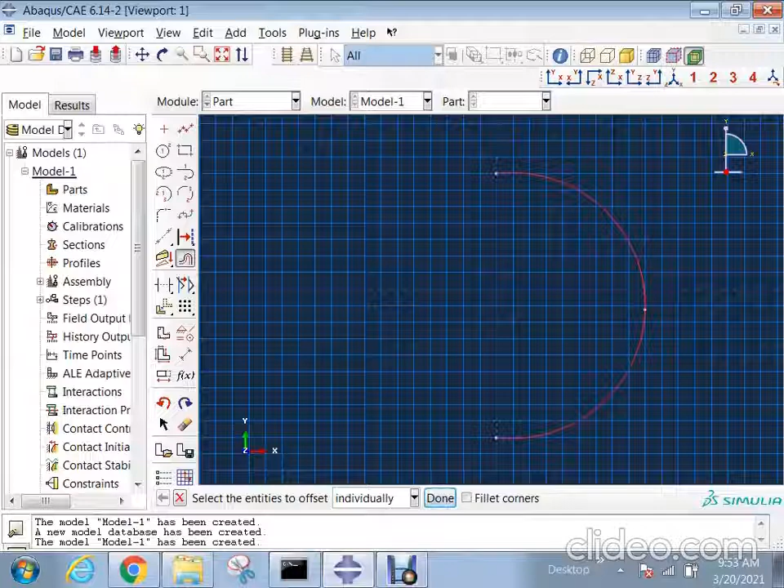So here the arch, just take an offset of it. Okay. So then I'll join these two lines.

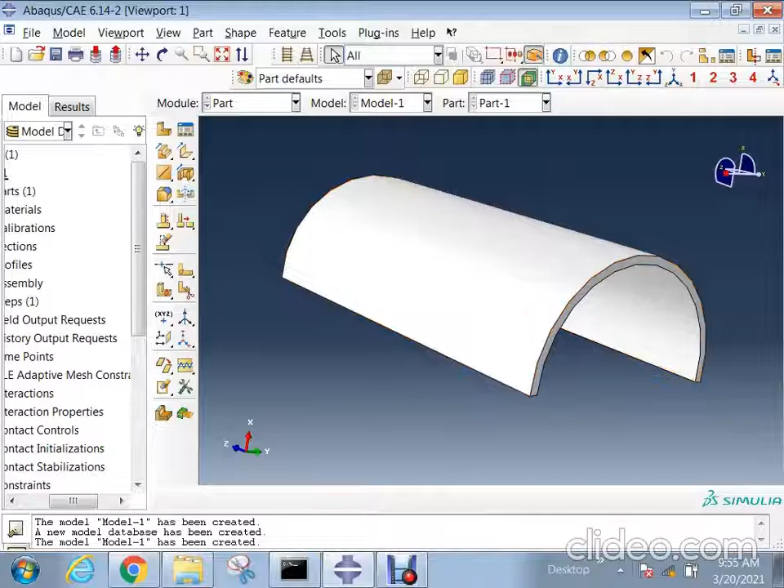So now we can see that this is a similar kind of arch. Okay, so we need to check for this what is our buckling load or critical buckling load using linear buckling analysis. So same, I'll take a material of this as steel itself.

Next, here for the step, go for linear perturbation. Here you can see that buckle, right? You can see this, right? So click on it, continue. You have two methods. One is the Lanczos method and the other is subspace. Subspace is for the limited frequencies or mode shapes you require. Lanczos is used for a large number of mode shapes you require.

For example, you want all the mode shapes for a certain range, then you can use the Lanczos method. Whereas if you require 10 to 15, you can use the subspace method. So I'll request here only 7 to 8. So I'll take 8 number of eigenvalues. Eigenvalues in the sense here buckling mode shapes. Okay. Now, if you want a maximum eigenvalue of interest, you can click here and you can write.

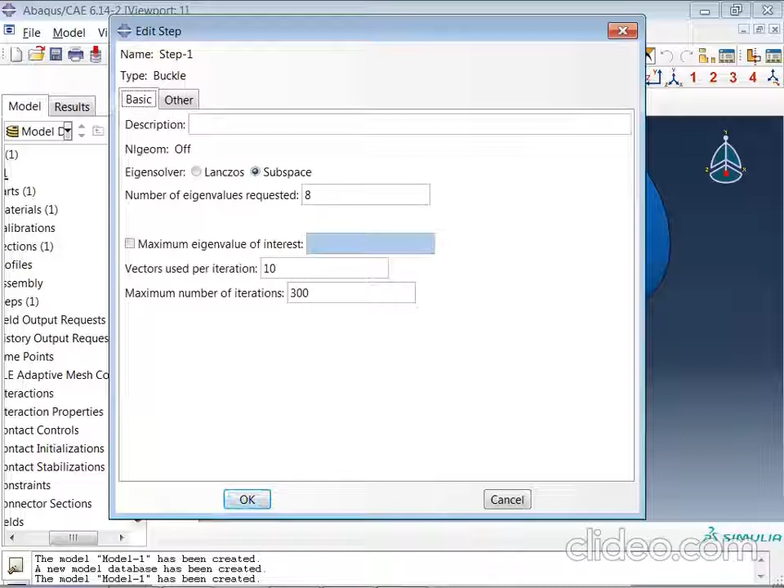And moving to the next is a symmetric solver itself, matrix storage. So this becomes your step 1 for buckling. Moving to the next is interaction. If any load or anything is there, you can use that, or else just move towards loading. So boundary condition is initial. I'll consider one end as a constraint. So encastre, and the other end I will be adding a compressive load.

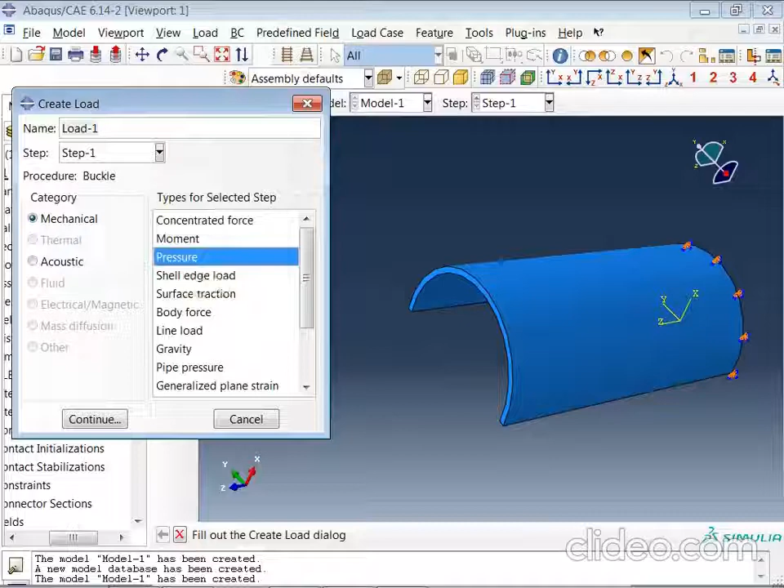So you can take pressure or anything. I'll consider a pressure or a surface traction. It will act only on the surface. So I'll select the surface. Now, what do you require? A shear value or a general? Here we are applying a compressive load, so I'll just consider a general value and the magnitude. I'll apply a very simple load like 1 as the magnitude.

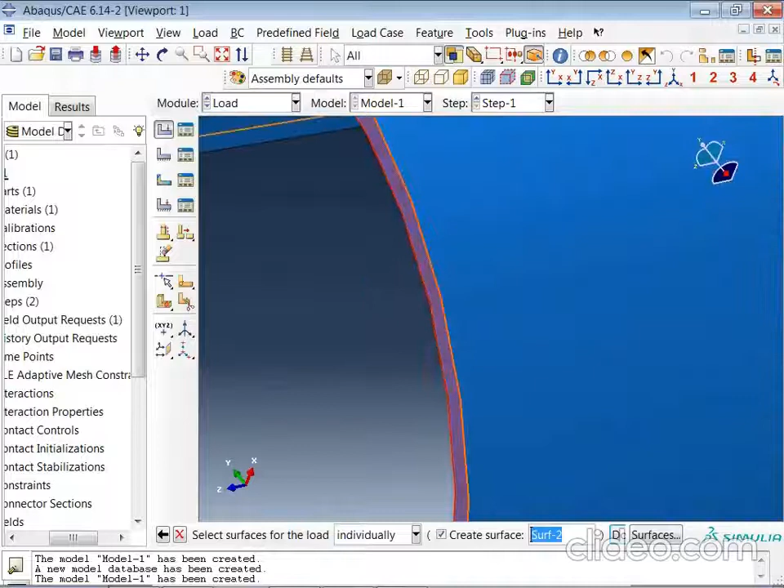Okay. So this load is not a proper one, so we'll delete this. We'll take a pressure load itself, that would be better. Select the surface and a magnitude I'll consider only 1. Why I have taken 1, I'll explain to you.

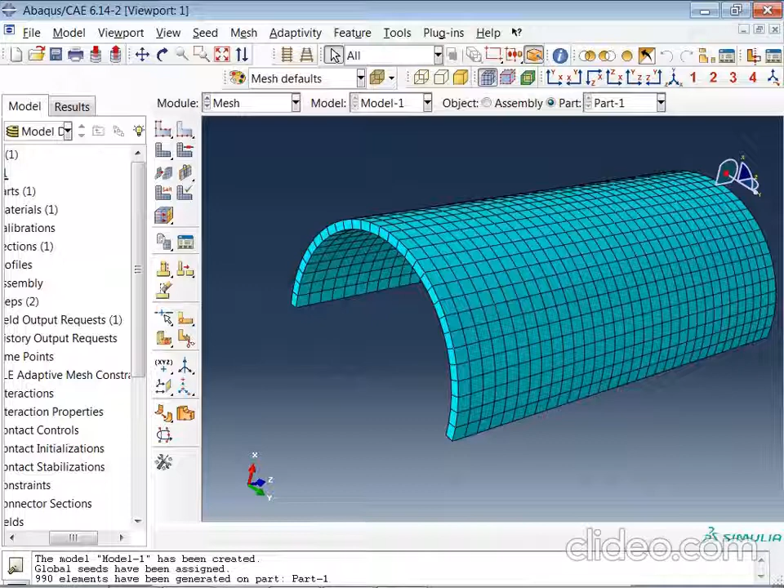So same thing, go for mesh, do the settings. I'll take 15, that would be better, and mesh. Now you can see that only a single element has been used through the thickness. If you use 2 elements, you can capture the elements properly. Okay, so let it be this way. We'll move to the next and I'll explain that. Now go to job, create a job and run it. That's it.

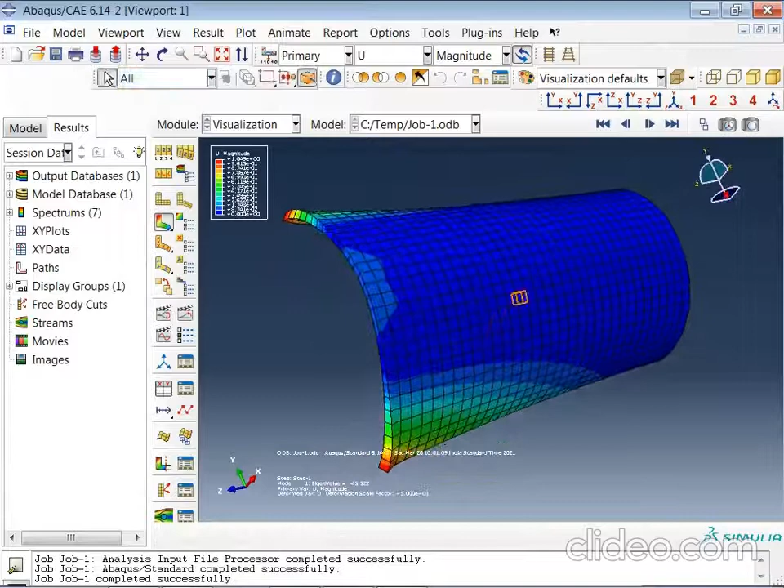So it is completed. Linear is very easy and very fast, so you can get the result easily. So now you can see your first mode. I'll just increase the viewport. Now we have eigenvalues: -45, -46, and 50. What does a minus value mean and why? What do these values mean exactly?

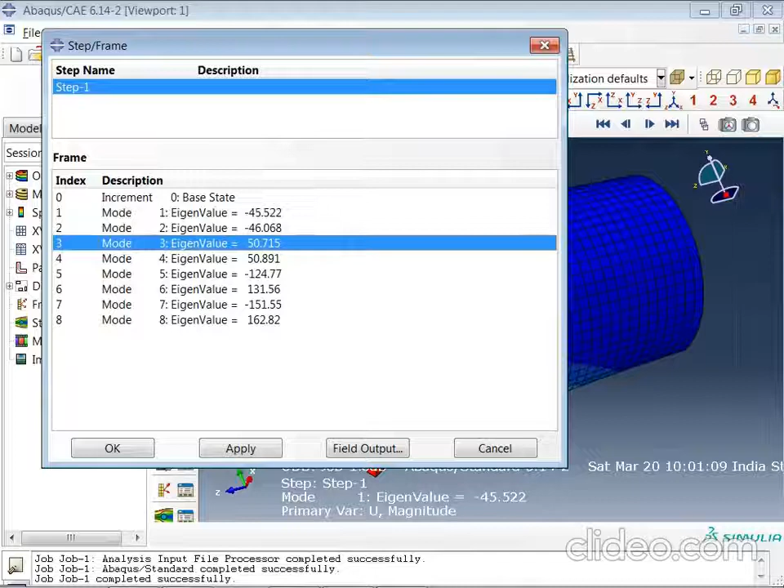See, when we have added a load, that is 1, a pressure load, right? For the first mode shape, see how your structure behaves: it is not pushing outward, it is just compressing itself for the pressure load of 1. If you say your structure needs to fail by buckling, you should multiply your load with this eigenvalue, that is -45.

Minus means that in this mode shape, or in this direction, it will not fail by buckling at all. Okay, so this is not a critical load or critical mode shape.

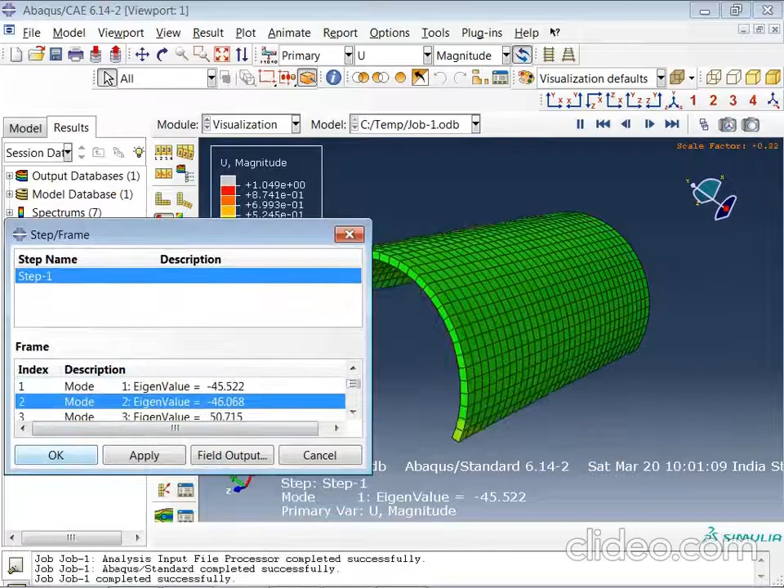Next, minus 46, again you can see that it is in the same direction, on the opposite side. You can say that minus 46 multiplied by your applied load is your critical buckling load, but even in this mode shape or in this direction your structure is not failing for buckling.

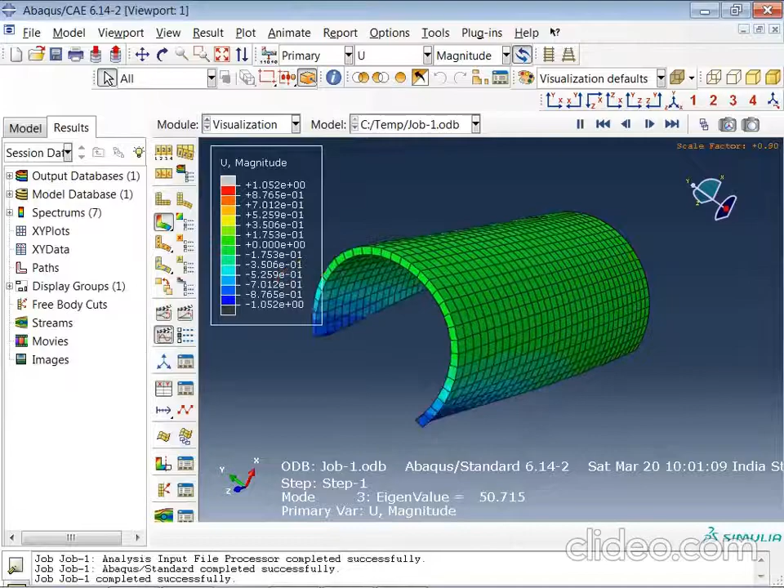Moving to the third value where you are getting a positive value, if you multiply that value with the load, this we call the load factor, that load becomes your critical buckling load. This is the third mode shape. For this, when you apply 50, your structure might fail for buckling. That is what this gives, the critical load value.

I think you are not properly understanding what exactly these values mean. Okay, I'll do one thing. We'll go for 2D elements. That gives you the proper thing. The same thing I'm doing, no change in that.

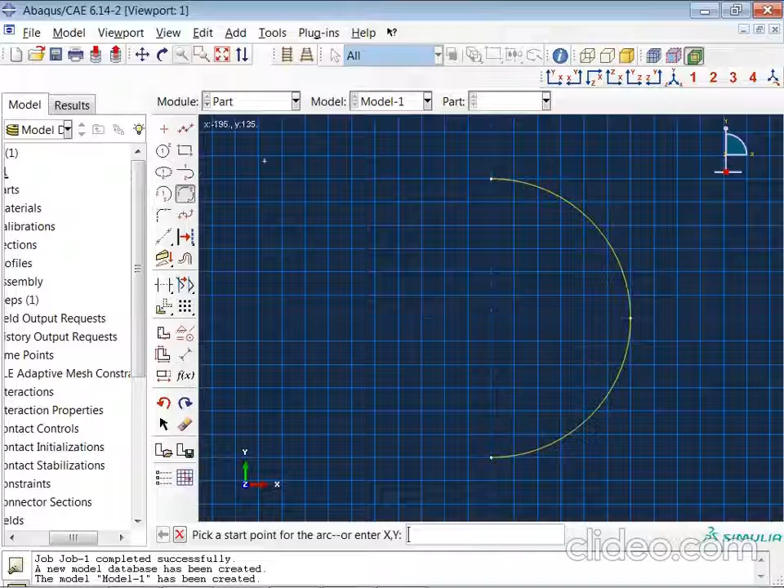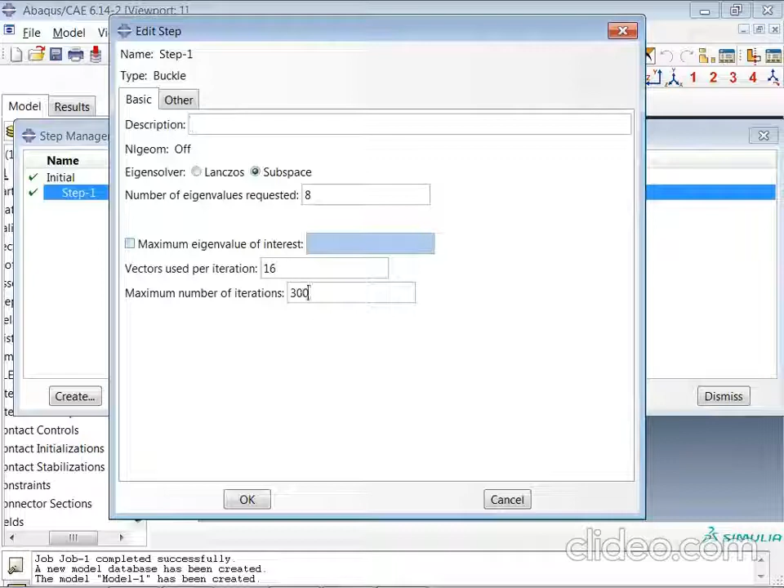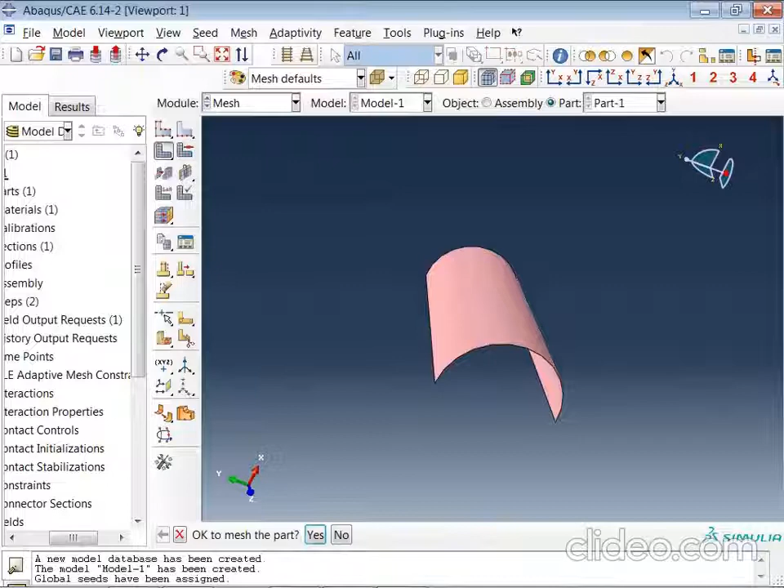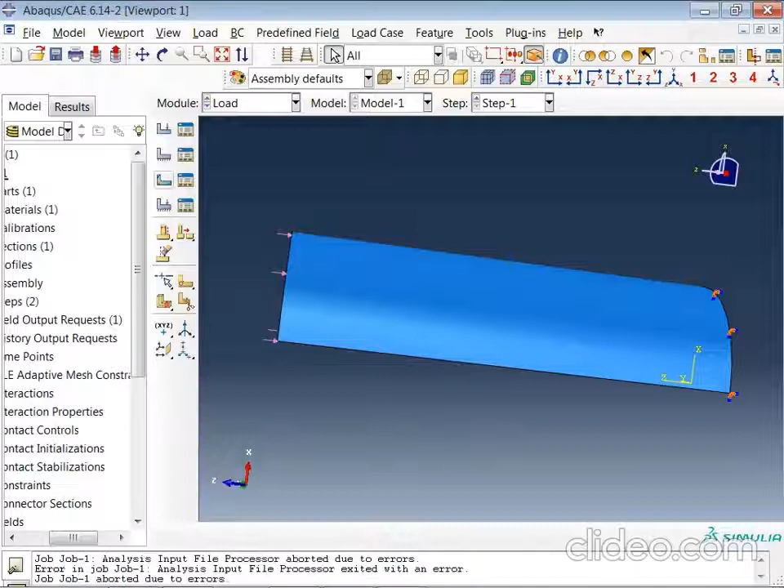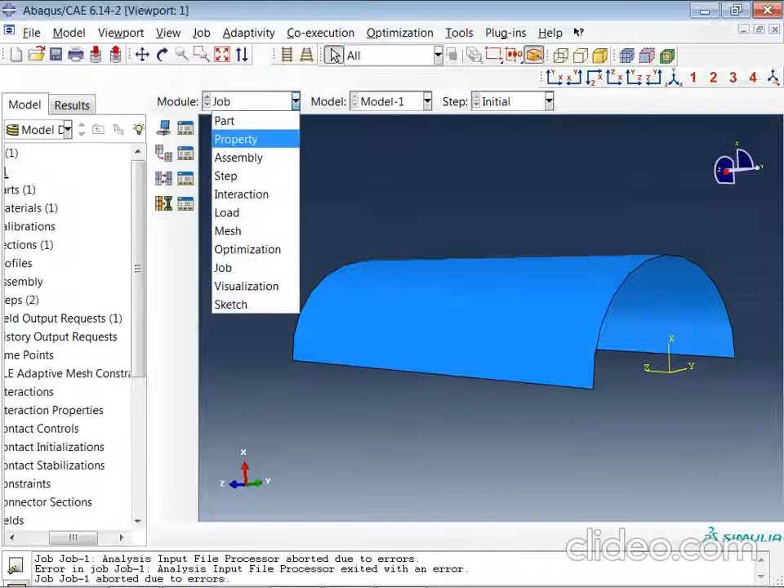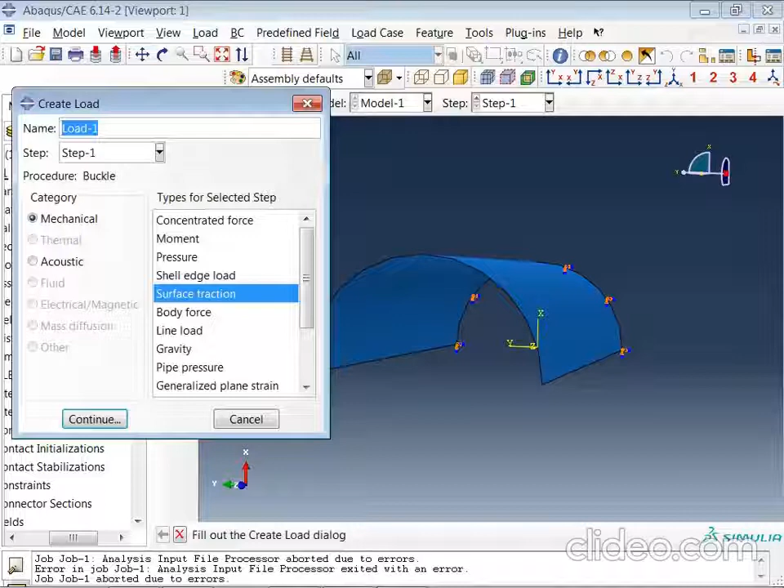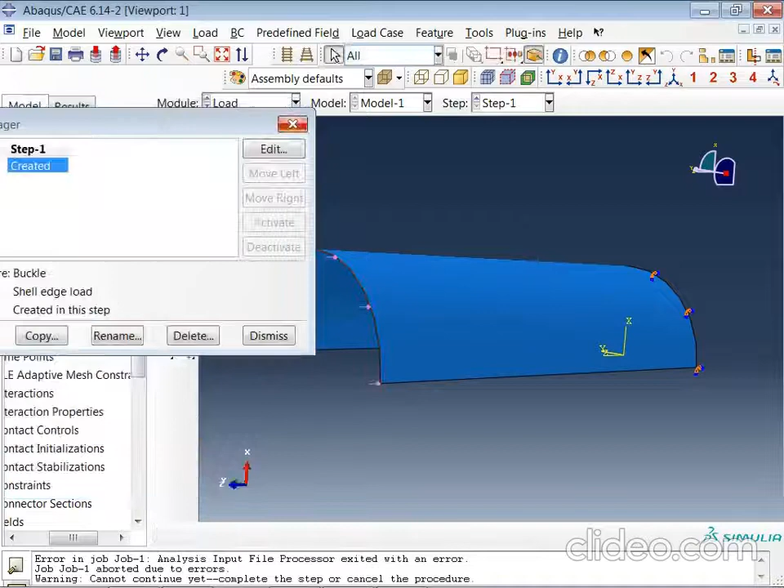Okay, so the loading is wrong here. Sir? Okay, let's check this. Yes, the load pressure is applied on the surface, not on the edge. So surface traction I will consider here. Okay, shell edge load. Yeah. So normal. I'll consider only this one value as 1. Go to job.

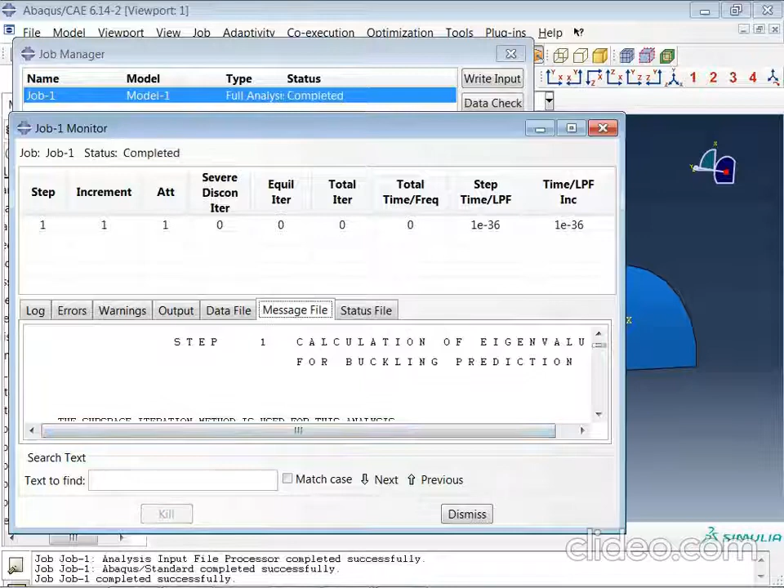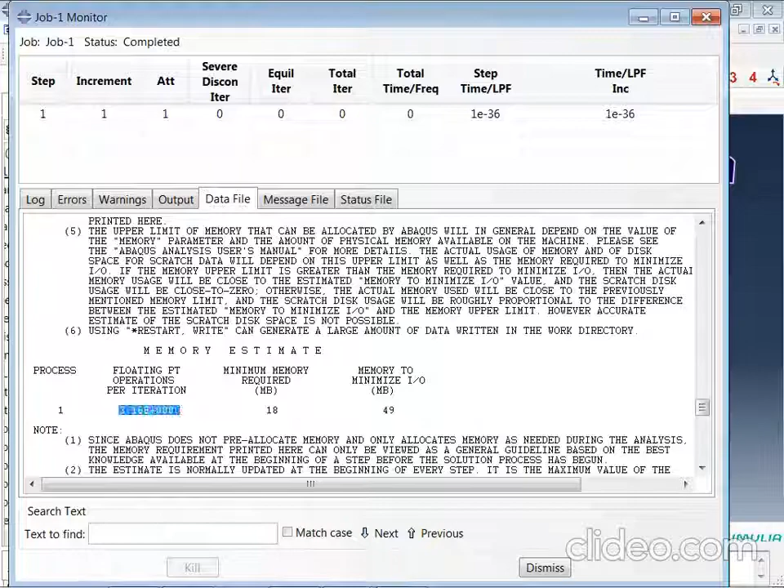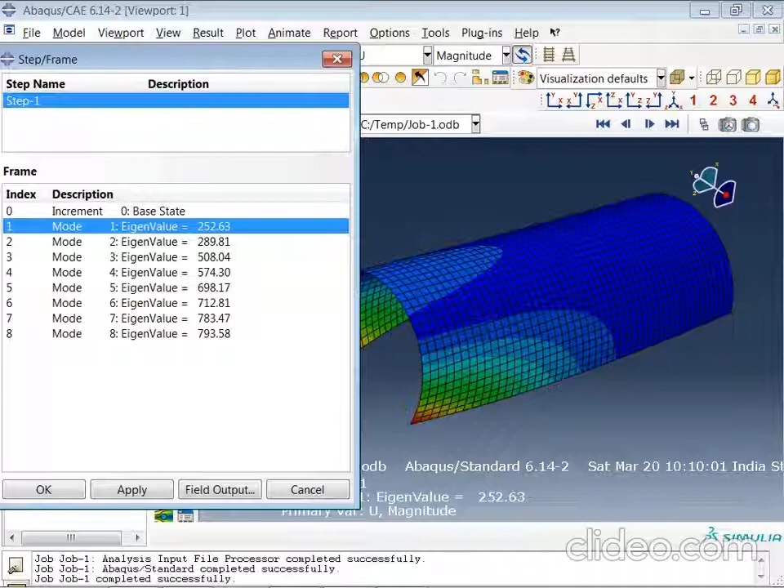Now it is completed and you can see that your iterations have been calculated. CG mass product origin. Okay, fine, we'll see that later. Once this is completed, you can see that you have a positive value of 252.63 for the first mode shape. Now there is no negative value. This means this structure will fail for buckling when 252.63 is taken into consideration.

In the sense, you multiply this load with 252.63, your value is 1.07. It is near to 1, right? This is the displacement value. And if you check the stress, stress is not there. So this 1 will be reduced to below 1. If it is 1, your structure is safe. Multiplying by this value gives your critical buckling load. So when you apply 252.63 complete load to the structure, your structure will fail in that buckling mode shape, since we had taken the value as 1.

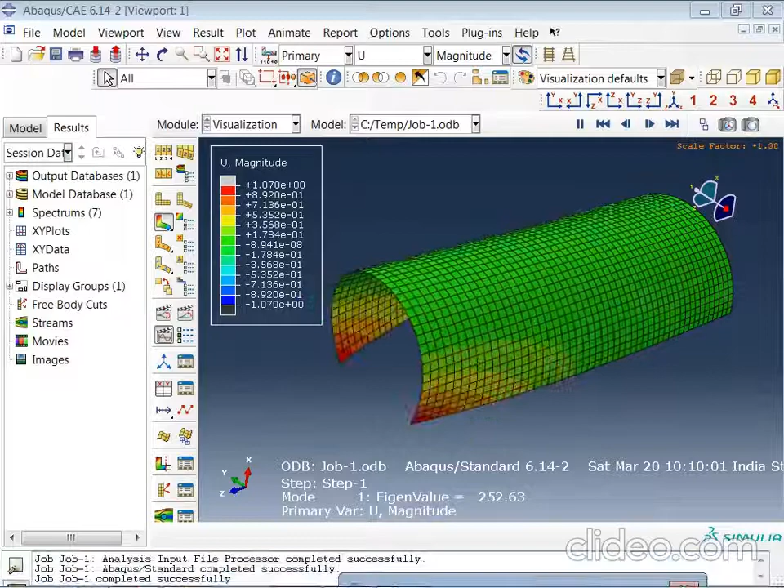So your critical buckling load is 252.63 in this mode. Similarly, if you are applying 10 Newton, then 252.63 into 10 is the maximum critical buckling load it can carry. So if you get a question to find the critical buckling load, check all 8 eigenvalues; the lowest value will be the critical one, because that is the lower load. If it can carry 200 or 600, the critical is 200. At 200 it fails. The lowest eigenvalue.

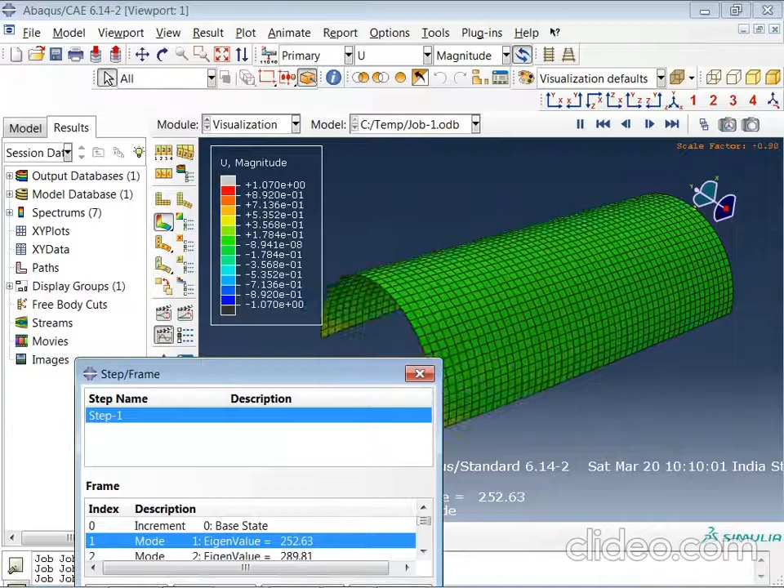So whatever input load you have, multiply it with the eigenvalue; that is the critical buckling load of the component for that particular mode shape, that is also important. Sometimes, as you can see, this shape cannot happen. If you apply a compressive load, this might not happen for the circular, right? Under compression you find failure at the center. The same thing I'll do with linear and non-linear both. To do non-linear, we require the linear solution. For the complete circular, you don't find this mode shape, or this load will not be a critical one.

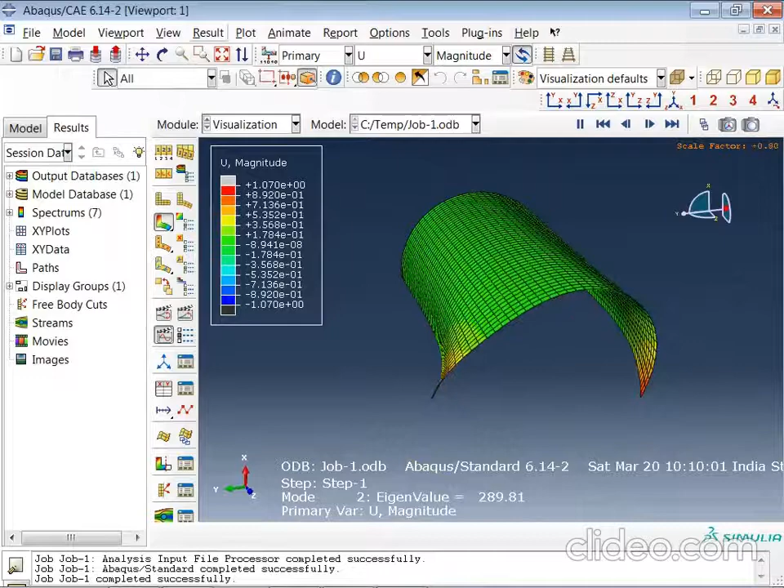For the second mode shape, you can see that it is flowing in one direction, the negative y direction, right? So your buckling might occur at 289.81 in this direction for your compressive load. Similarly, if you go for the third mode, now you can see it is buckling at the edges. This should be clear for you.

The load is applied, your edges are getting inside. Okay, so that is the other mode shape to failure. But we say that the first and second are more critical for the longer or beam kind of structures. Okay, so this is very simple to do.

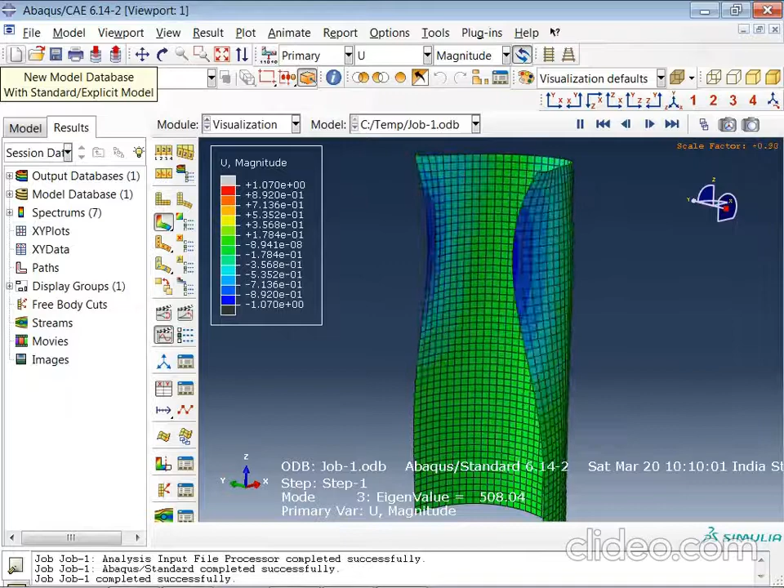So moving to the next is non-linear buckling analysis. For non-linear, we require a linear buckling. First we'll do a linear buckling. We take what we call geometrical imperfections. To do a non-linear, the geometrical imperfections will be taken from a linear buckling analysis, and those imperfections will be added to your non-linear buckling analysis. Okay, so I'll show how we do that.

So for that I am considering one problem which is done in Abaqus itself for a cylinder. At the end it is fixed, and at the top the point load or the pressure load is added, with the material as aluminium and giving a bilinear stress strain curve for non-linearity.

And the cylinder diameter is 500 and the length is 500 mm. Why this 500 and 500? We are taking a D by L ratio or L by D ratio, what we call a slenderness ratio, as 1. For that we are considering this as a thin cylinder problem. It is similar to the arch itself. I am just considering it because I got all the values for buckling, non-linearity and everything. Again we are using units tonne, mm, Newton, second.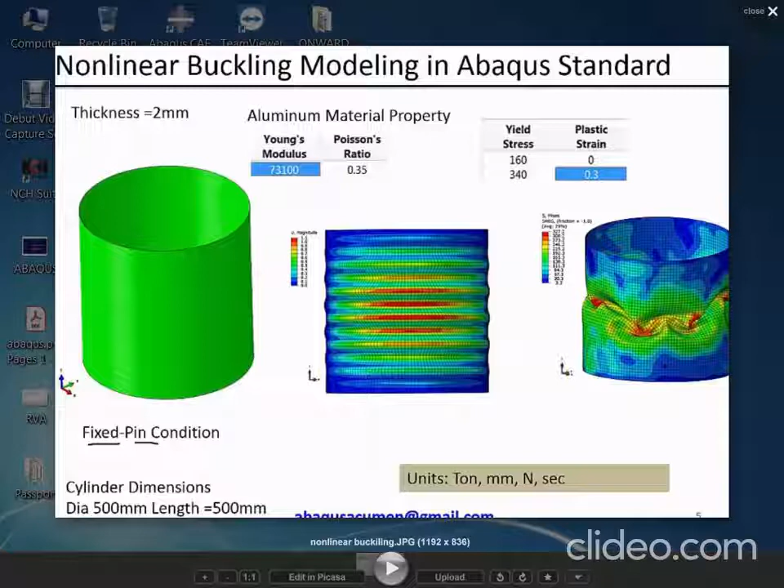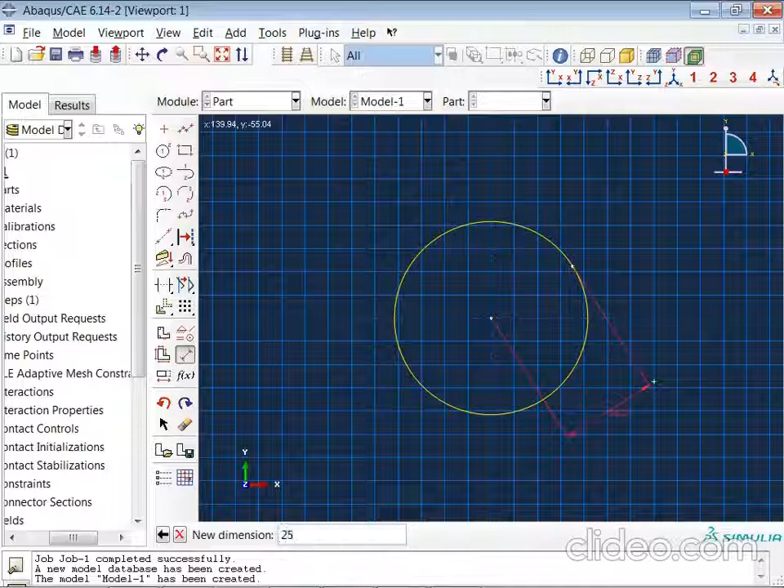So I'll just start with that non-linearity. For that, first we solve a linear problem, take the output of the linear, and add it to the non-linear. Again shell. So 500 as a diameter, in the sense radius will be 250. Length is also 500. So you can see this cylinder. Now for this I require 2 points to add point loads. So I'll go to interaction, but prior to that everything needs to be defined.

Now here in property, I'll take aluminium as it is mentioned there. First thing density, second is elasticity, and then we go for plasticity of the material as a stress strain curve. Now you can see what I talked about, the hardening rule. The hardening rule is isotropic, kinematic, Johnson-Cook and combined. These we don't use much; isotropic or kinematic we use more. So I am considering the default isotropic hardening rule. If you want to know more, just go and search why it is called isotropic and why it is called kinematic hardening. It is a wonderful topic. Okay, so you got all the three.

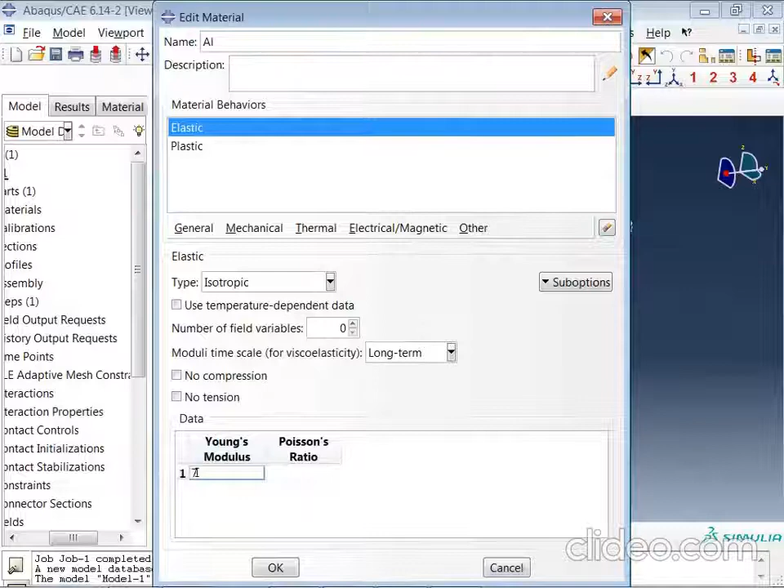So density is 7. Sorry, density he has not taken. Fine, no issue. I'll delete the density. So Young's modulus is 73100 and Poisson's ratio is 0.35. Going to plasticity, as it is a bilinear curve, we have only two values. At the yield point it is 160 and the ultimate is 340. At yield the plastic strain is 0, and at 340 it is 0.3.

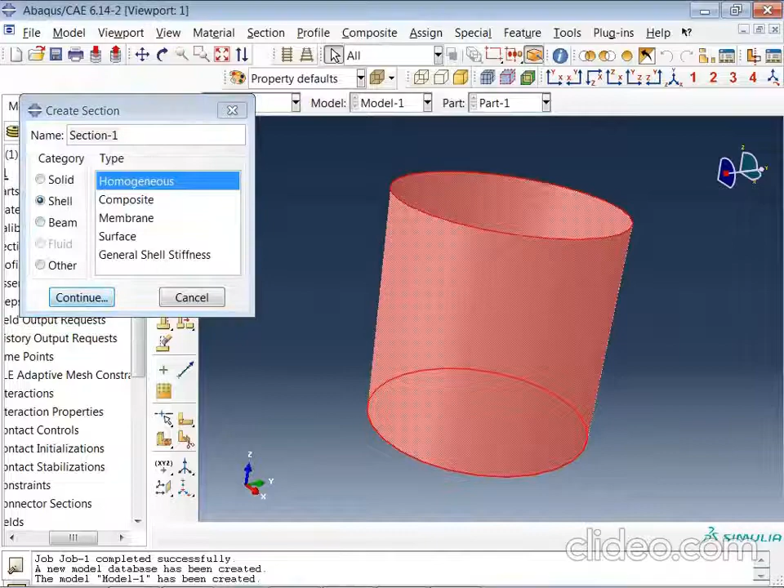So I'll add 160, 0, enter, 340, 0.3. For a multilinear curve you have more entries here. This is a bilinear curve, so we took only two values. Okay, so the material has been generated. Apply the section, shell, homogeneous, and now the thickness. As they have mentioned 2 mm, I'll consider 2.

And assign the thickness to the mid surface. Here one more option was there: top surface, bottom surface, specific value from geometry, or mid surface. We always prefer mid surfaces to account for both compression and tension of the geometry. If I take the top or outer surface of your geometry, it only accounts for compression; tension will be ignored. So always we take mid surface. Sometimes we use top or bottom because some features will have different steps. For example, the geometry is this way and the adjacent geometry is this way.

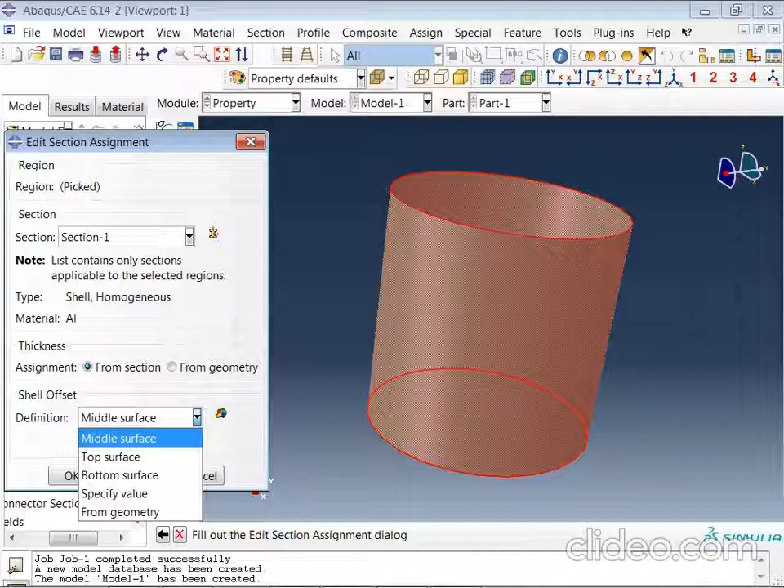If you take a mid surface, the portion changes, right? We call this type of modeling as offset modeling. Mid surface, both are equal. The adjacent should be also in the same line. But here it is 3/4 and here 1/4. The thickness also we need to assign in that manner as user defined. We call this type of modeling as offset, thickness offset. Okay. So I'll consider the mid surface.

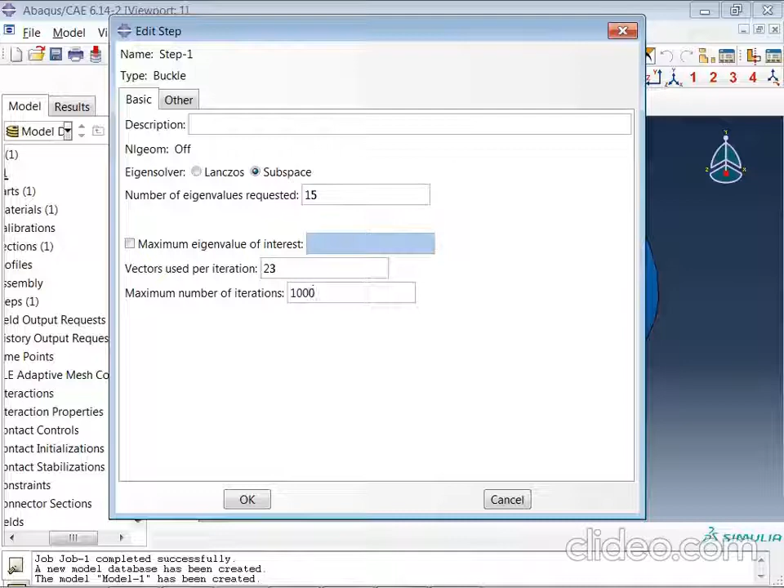So for that subspace, I'll call here for 10 mode shapes or 15 mode shapes, and iteration per 23. For this again I will take around 300, or you better take a higher value around 1000. Otherwise your solver gets an error. Okay, so just click OK.

Then interactions. Why am I taking this interaction? I want to apply a point load. So for that I'll take 2 points at the center. So I'll create 0, 0, 0, 1 at the bottom. You can see that 1 at the bottom at the center, and the other 0, 0, 500 at the top.

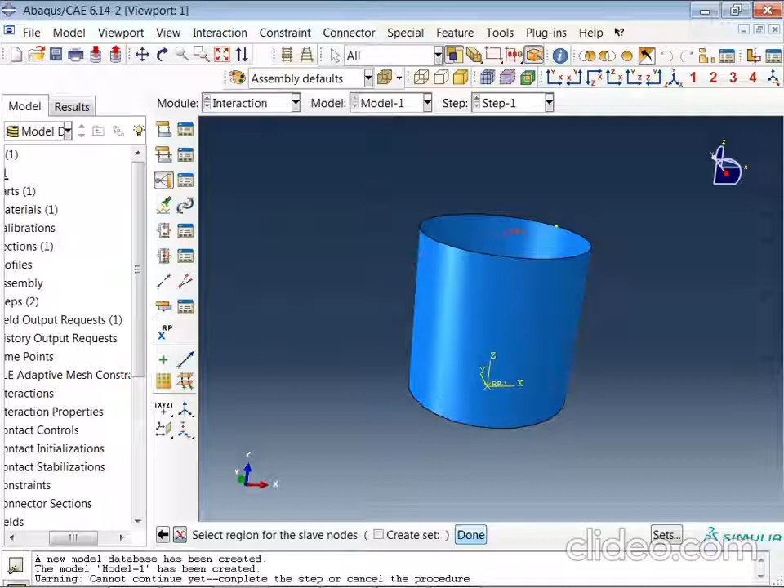Okay. Now I'll create a rigid MPC. Select a point. Sorry, only the edge. Okay, so I'll take here tie. So you can see that a tie has been generated with 1 point. Similarly with the next. Okay, for the same cylinder, top and bottom I have taken 2 points. It will be easy to apply the load and a boundary condition.

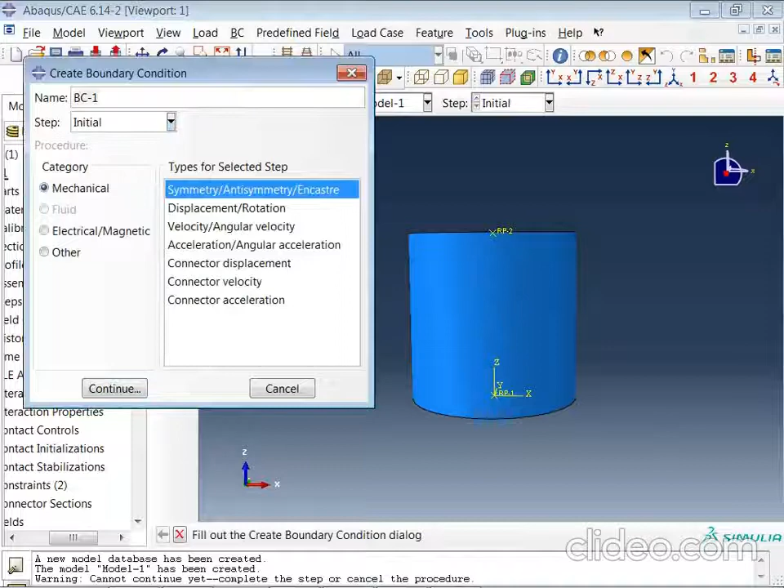So now boundary condition for initial, symmetric, only consider the bottom point constraint. Yes, same again boundary condition. I don't want my upper point to have a deflection in either direction. So what I'll do, leaving Z, the same point, leaving Z, sorry, I will arrest the entire thing.

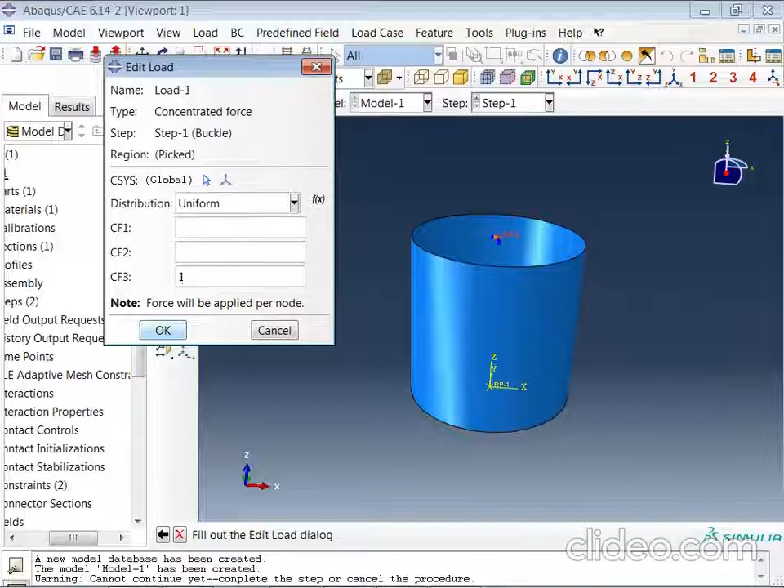For that point, I'll add a load, concentrated load in Z direction as 1000. Okay, no, 1000, what have they taken as the load? Okay, fine. I'll consider 1 itself, that would be better for giving an example. Click OK. Next, mesh the parts. So I'll take this as 10 mm because you'll get more features. The finer mesh.

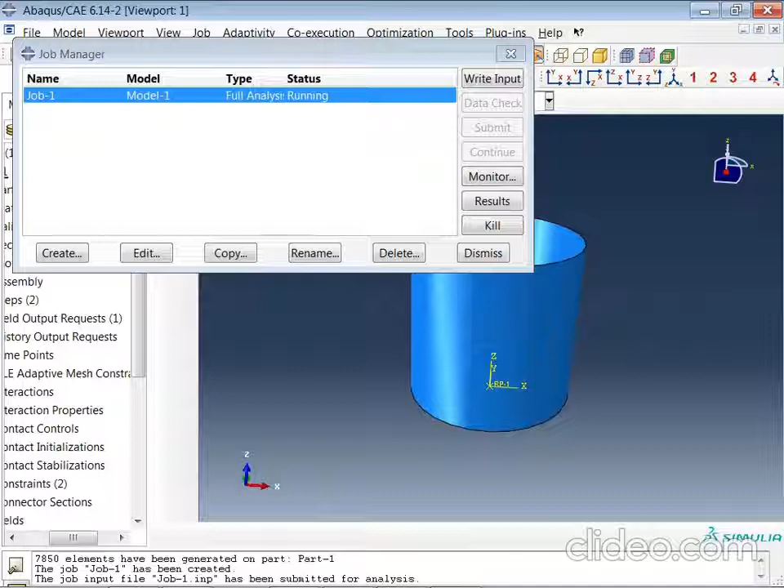Go to job, create a job, submit it. So once it is solved, your linear buckling analysis is done. For the non-linear buckling analysis, you need to change a little bit. What is that? We need to add node file, star node file as U. That means your node displacements are required to account for an imperfection of your geometry for non-linearity. So I'll show how we do that. So first we'll see what value we got for linear buckling, the load.

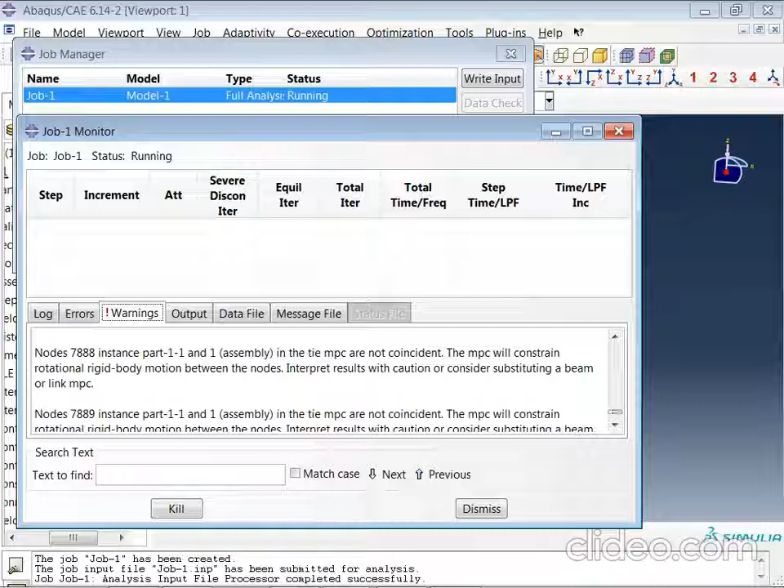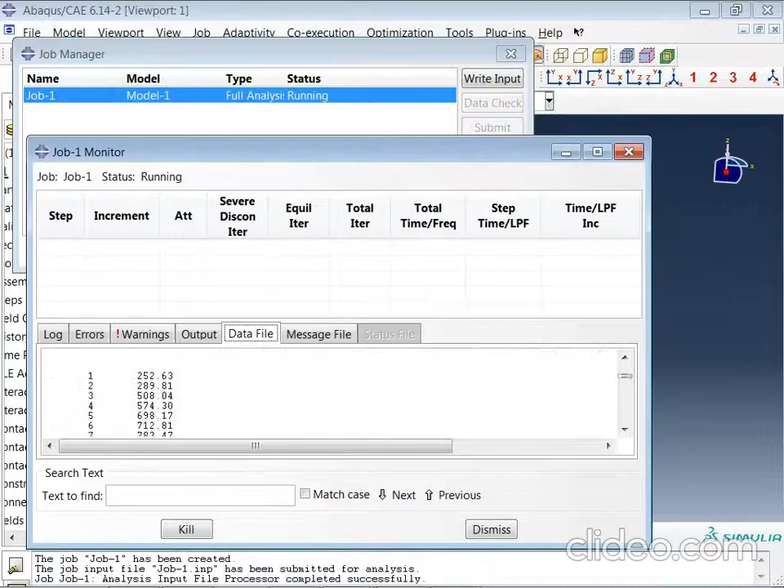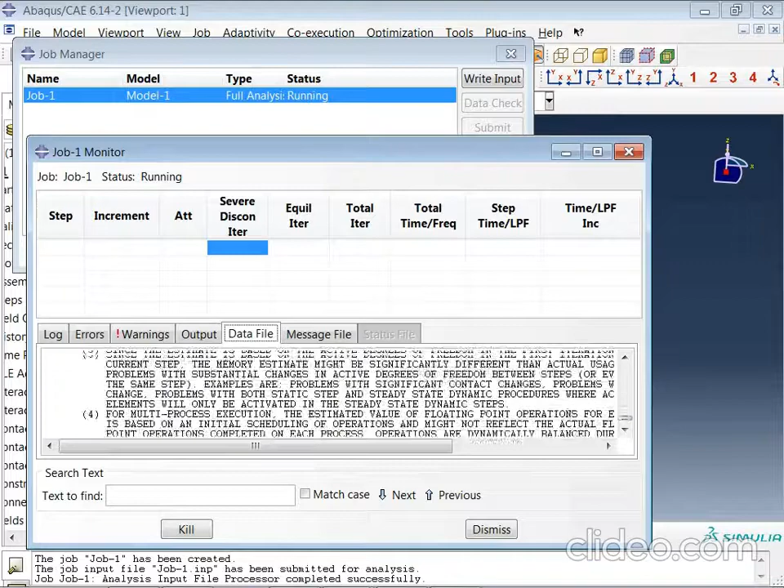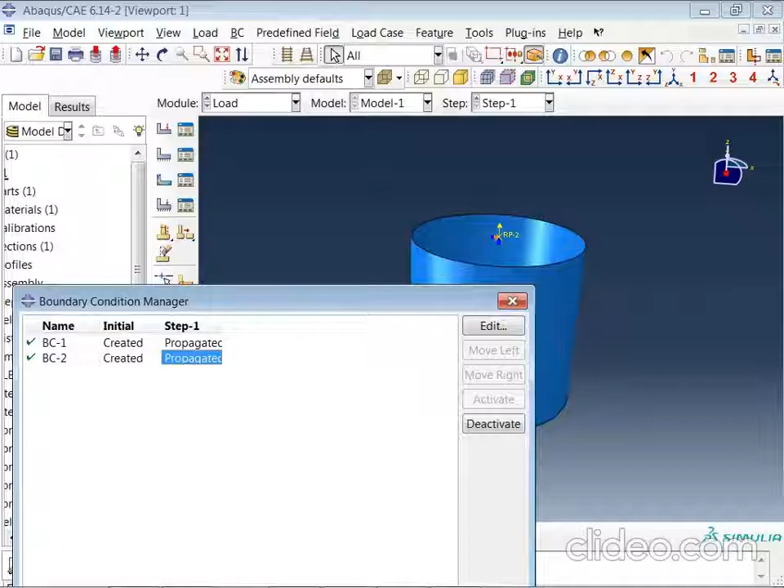Okay. Load is applied in the opposite direction. Let me fix this, 1 second. Go to load, edit, so I'll take -1, okay, and I'll delete one more, just deactivate or delete completely, okay. So then go for job, create a job.

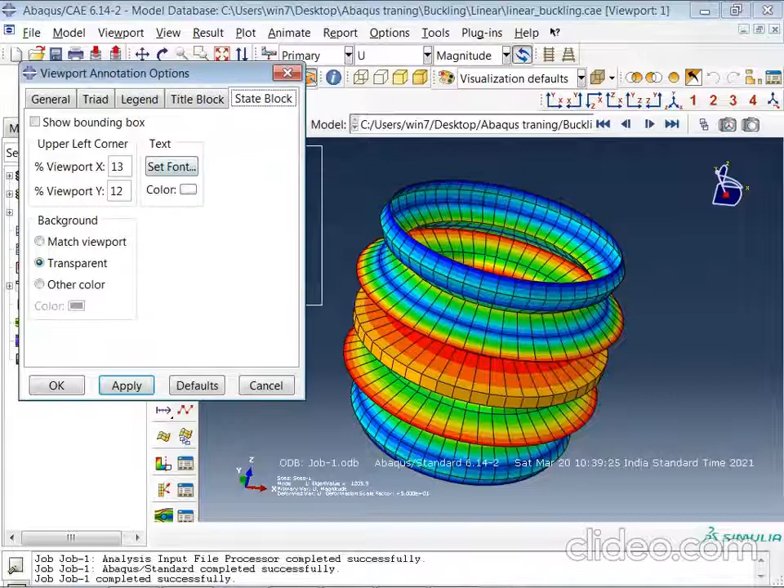Complete. So you can see that, guys. I'll show. So you can see the buckling; it is not in geometry imperfections much, okay, and the load you are getting for the first mode, the result time frame for the first, is 1200, like 1205.9, as a critical load for this cylinder, for whatever condition they have given.

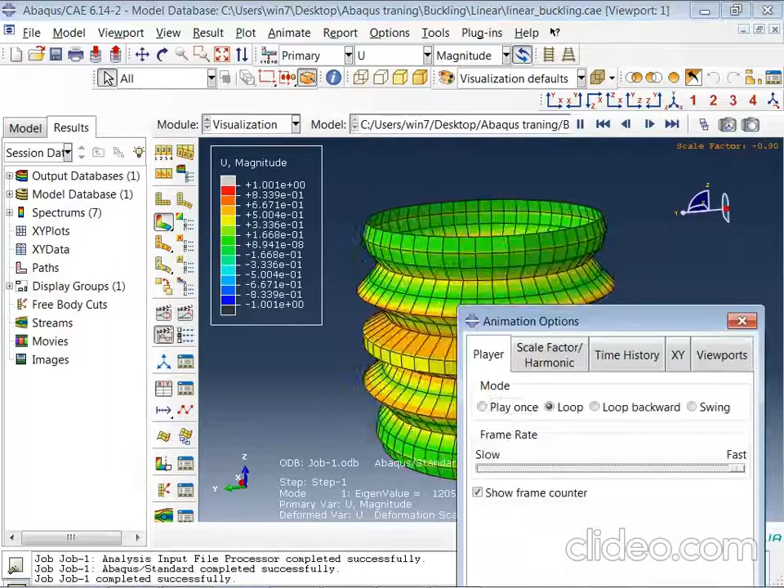You can write it down as 1205.9. Just note down this value. When you do a non-linear, compare the value for the same thing. Here it has not taken any of your non-linearity. Okay, so you understood this. Everything is same. I have not changed anything.

Now for the non-linearity, what we need to do is, for the same thing, edit keyword is there on the model. If you go and click on the model, there is an edit keyword. So it will open your deck. Whatever you have done, it will open your deck.

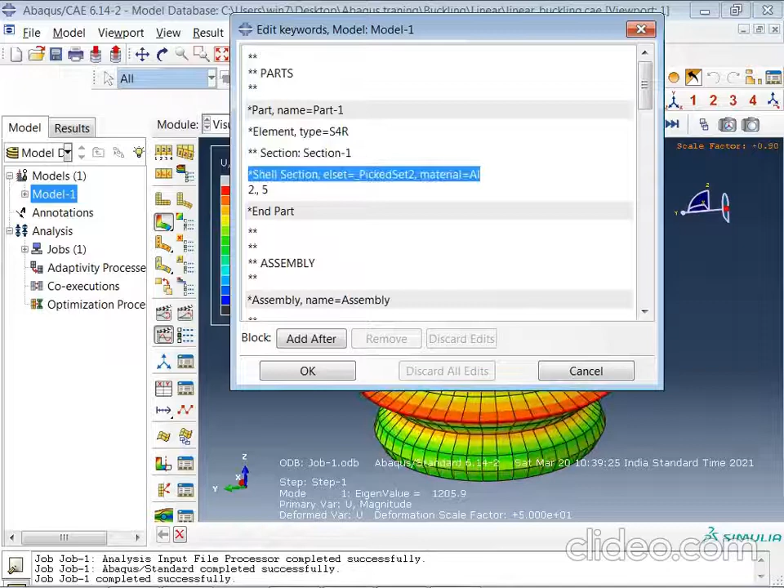So here your deck starts from the part, and element type is S4R, section, thickness, and when it comes to assembly, your instance has been created. Sorry, you have created MPCs, 2 MPCs, that assembly is being completed, material is given. If any changes you want to do, you can also change in this, that is your text format, what we say as a deck. Okay, so now boundary condition, *Step is started, *Buckle.

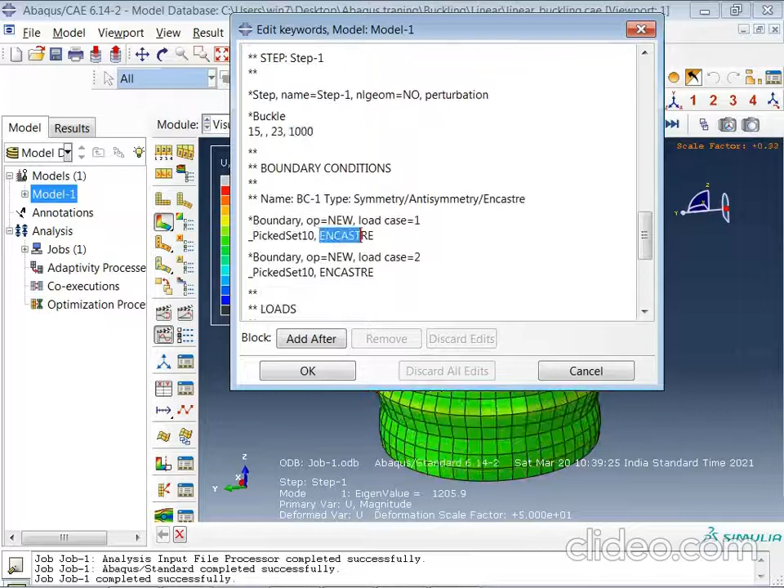We have requested 15 mode shapes, and iterations are 23, and the iterations can be taken up to 1000. Okay, so boundary condition encastre, we have given load, we have applied a CLOAD, that is point load, as 1000 downward. That means your load is 1000 into 1205.9. So that load is for your critical buckling load.

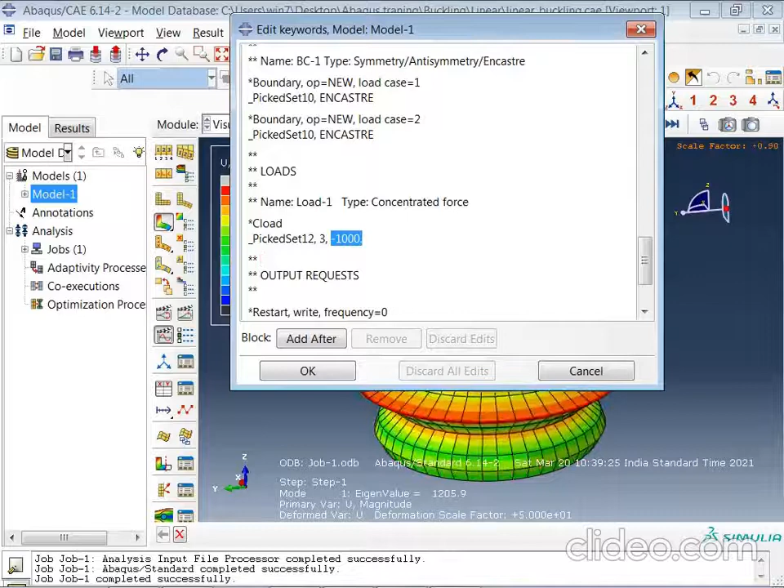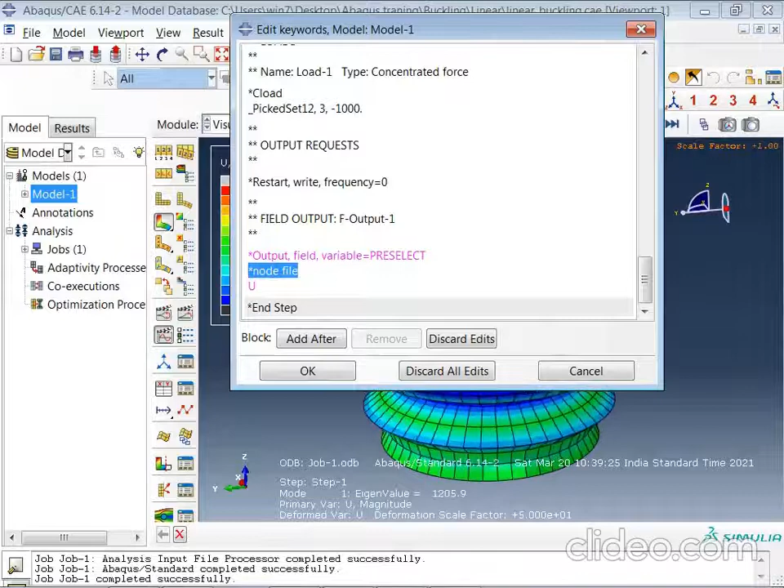Okay, now what we require to request for non-linearity to get the geometrical imperfection is, just enter star, I have written it, *Node File, enter U, capital U. You can see this, *Node File, enter U. Once this is done, as I said, it will write your file. That means this will write, for each node, a separate file called the node file. So that we are requesting from the linear buckling analysis.

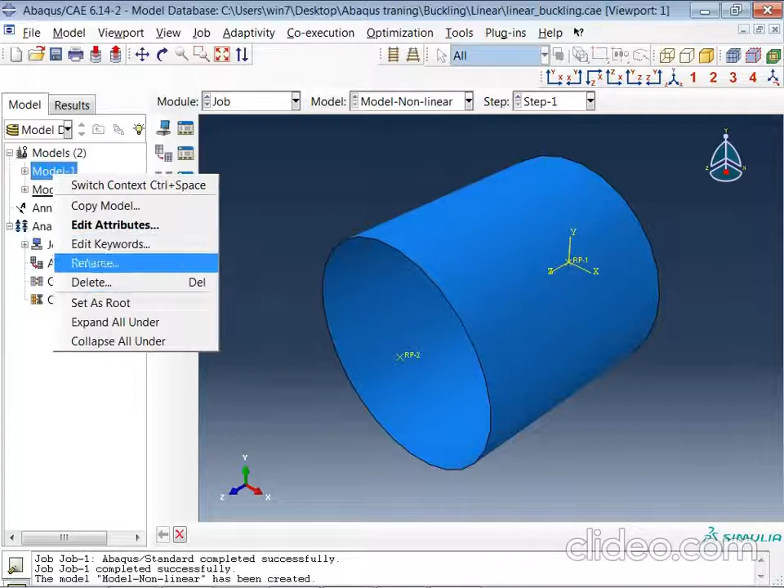So now I'll go back again to job. I'll submit the job for run again because I require the node file, which will be called for non-linear analysis. So once this is done, for the same job, I'll copy that model. So this is done now with node file. At the same location, I'll not change anything. I'm copying this model as Model-Non-linear. So as you can see, there is model 1 which is linear. I'll rename this as linear, and the second model is non-linear.

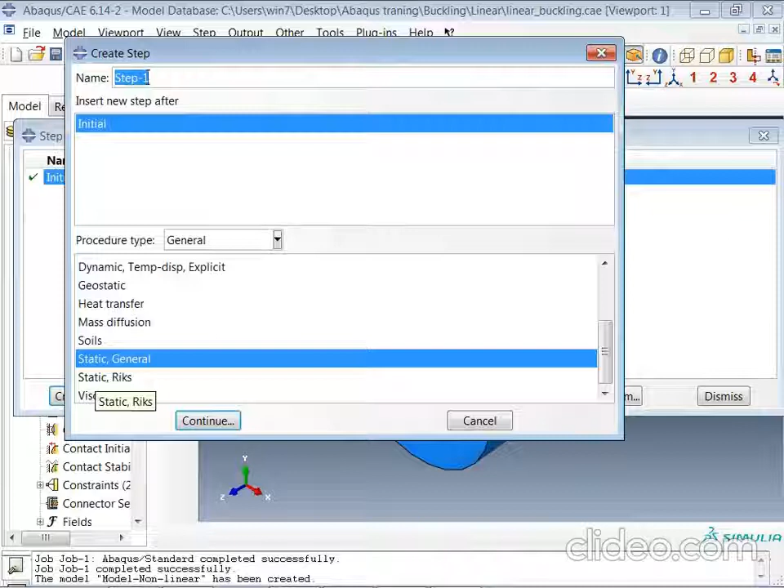I'll go to second model. It is same as linear itself. Now I'll change here. I'll go for step. I'll delete this step and create a new one. What is that new one? It is Static Riks. So that means it does a non-linear buckling analysis for static load. So Static Riks, continue.

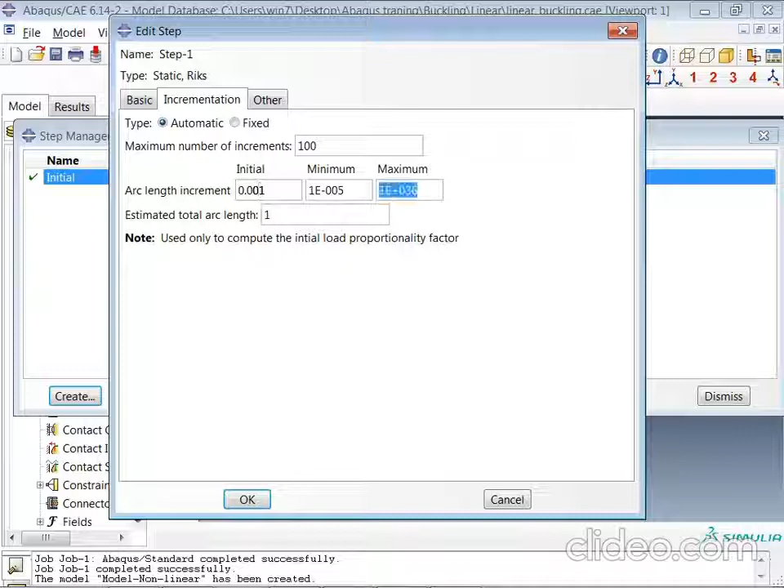Again, here you need to turn on NLGEOM. So again you can use maximum load proportionality factor or degrees of freedom, anything. That is fine. Go to increments, number of increments required, how much time you require to solve your problem. So I will take minimum step as 0.001 as an initial step, and maximum, 1000 steps are sufficient for me, and number of increments I'll take thousands.

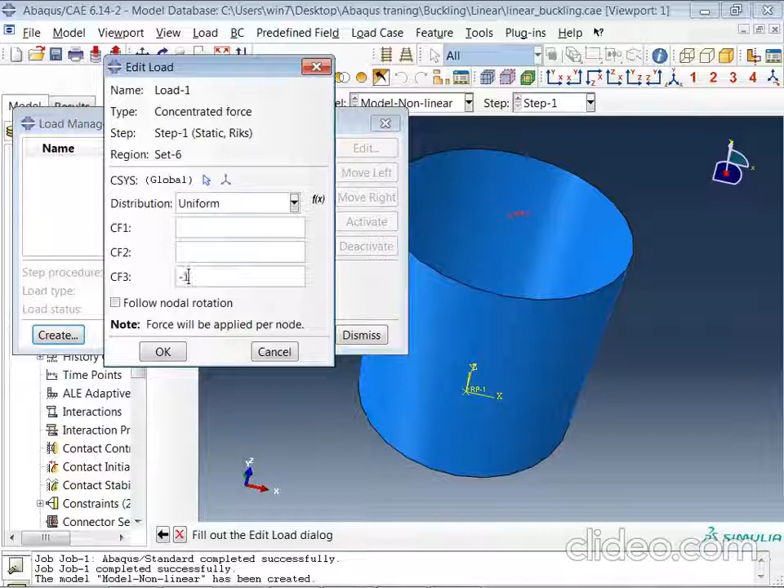So estimated arc length, let it be 1. Use default. Everything will be default. So Static Riks. Enter. Now go back to loads. Check the load is there or not. It has been deleted because it was for that step. So create it once again as a point load for step 1 as minus 1000, right? We have taken the same 1000 load. So click OK, close. Then check for boundary condition. Boundary condition is there because we have created that for initial.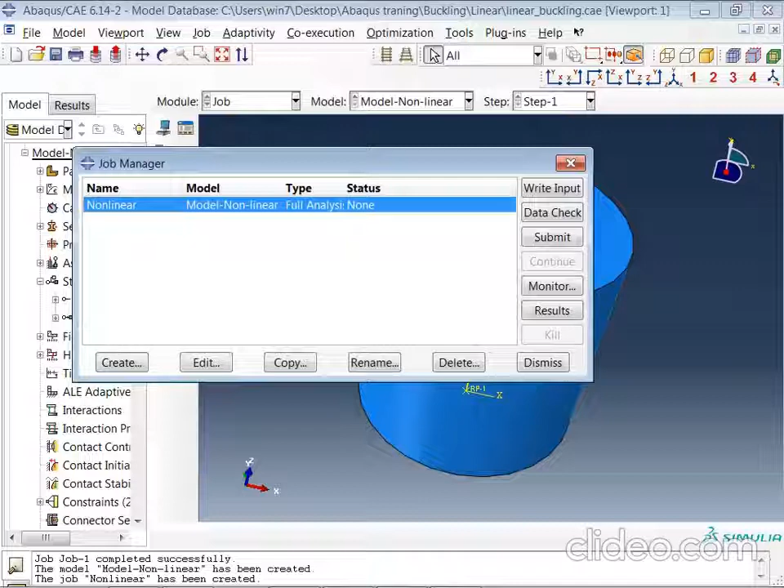Next, mesh is there. If you want a finer mesh, you can do it so that you can get more clarity on the load path. Job: again, this job I'll delete. I'll create a new one as non-linear. Continue. So this job is created now. Prior to that, I'll call the file which I have taken from the linear analysis. Right click, edit keywords. Your deck will be created for that.

So now you can see that your *Step has been created. *Static, Riks. Your initial time increment, and final increment is 1. Steps are 1000. So load is given, everything. Here again, what I'll do? I'll delete this.

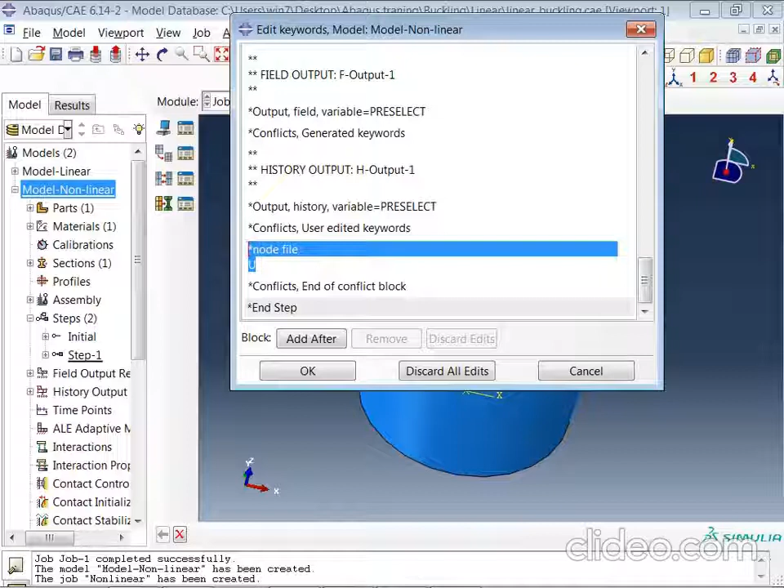Sorry for that. So what we need to do is add one more line, that is *Imperfection.